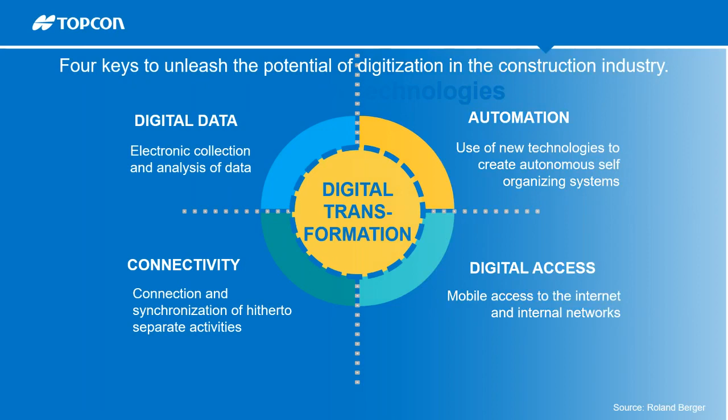Construction technologies. When you hear about construction technologies, what comes to your mind? Maybe drone technology or unmanned aerial vehicles for capturing real-time images from the field in less time and more accurately. There are many applications for drones in construction, such as inspection, monitoring, and project progress.

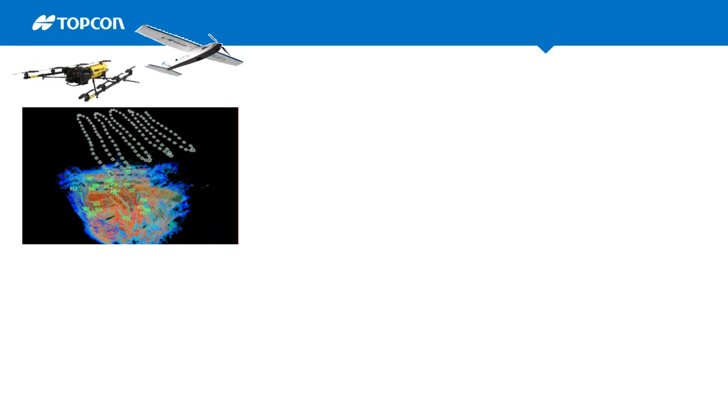Also, the 3D scanner is a high accuracy mapping instrument. It uses a laser beam to quickly capture complete details of the entire building construction project, indoor and outdoor, to create point cloud data. It's a great technology to save time and decrease error, where the scanner can collect 1 million points per second. It delivers 3D CAD models, BIM integration, and as-built documentation.

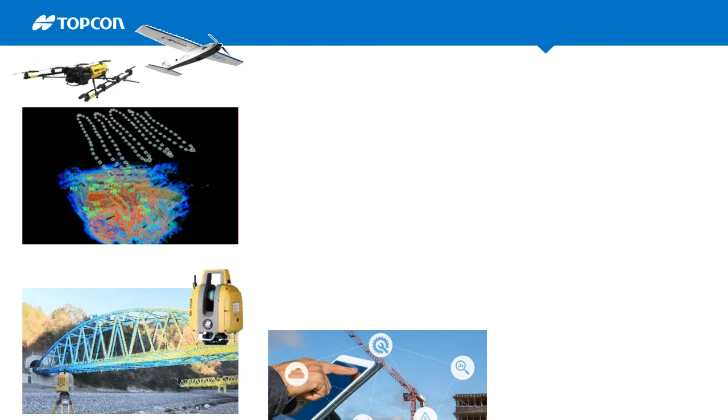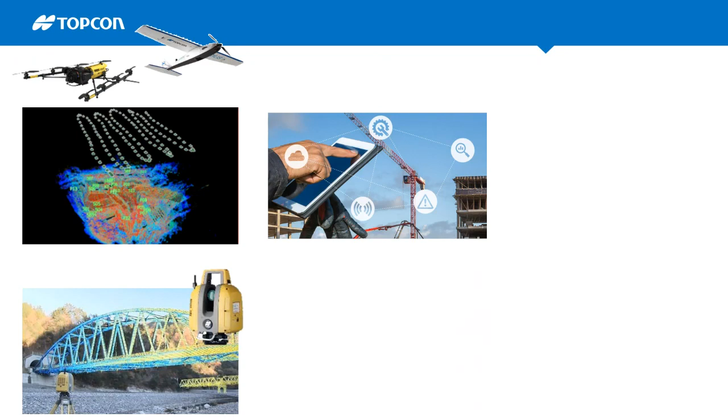Also, the Internet of Things connects products and plant sensors, systems, and machines using sensors and software. It's widely used in remote operations and fleet management and maintenance as well. 3D construction printing is computer-controlled sequential layering of material to create three-dimensional shapes. It's used to fabricate building and construction components.

Also, 3D construction mobile mapping systems. These are 3D scanners mounted on a vehicle, with LiDAR and GPS technology in addition to cameras, all mounted together on the car or vehicle, where you can scan and acquire colored 3D point cloud data in real time. Also, BIM technology: it's an integrated 3D model where you can manage, construct, design, and plan buildings and infrastructure.

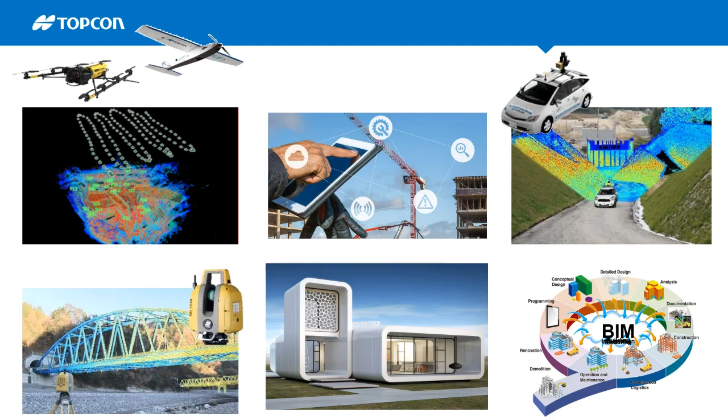Now we can see also robotics in construction. This could be off-site fabrication systems or on-site automated, or even drones itself.

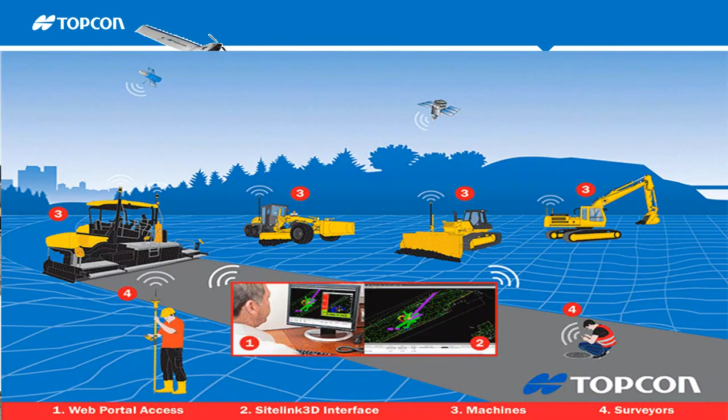And finally, we know about the 3D machine control systems for heavy machines, where we bring all the technology of GPS or total station combined with sensors and hydraulic valves and controllers to automate the blade of the grader or dozer or excavator, whatever the heavy machine is. The system will always follow the 3D design for cutting and filling and leveling. These systems are greatly contributing to improve the efficiency of civil engineering work.

Evolution of the construction technology. There is great evolution occurred in the construction technology for the last 20 years, shifting from computer on your desk to mobile connectivity, Wi-Fi, Bluetooth, GPS, and high-resolution cameras. All that have changed the industry of construction.

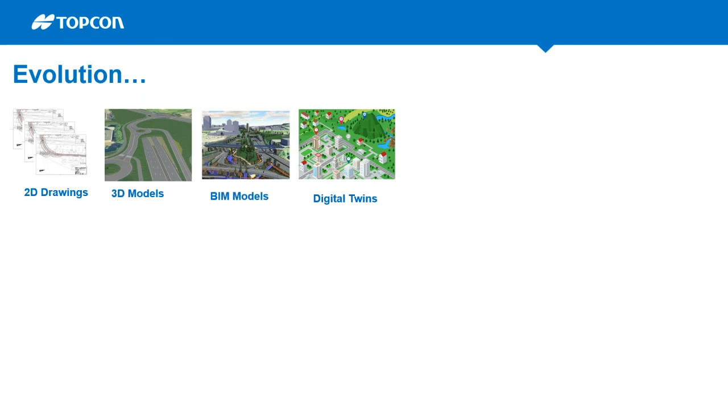We see that in 2D, shifting from 2D to 3D models, then BIM models, then now we have the digital twin. And if you look at surveying equipment, the same as like Craig said, that he was using theodolite. So now we see from theodolite to mechanical total station, then motorized total station, then robotic total station. Finally, now we have total station with a scanner.

The same thing happened with GPS technology, where GPS can be mounted on a car and collecting data and information while moving and even while tilting the GPS itself. So the same thing happened with scanning. Scanners are also developed from basic 3D scanners to high-tech scanners measuring 1 million points per second. Adding sensors to these scanners like IMU, we are able to put the scanner on the car and move in the street to collect 3D data and point cloud very accurately and very fast.

And now we are also having drones. Drones, you fly the drone and you collect images with very high resolution and you create the survey and design.

Alaa, just in terms of the accuracy, what is the accuracy when you say very accurate? When I say very accurate, it's related to the requirements itself. So when we talk about total station, the accuracy of total station could be from 5 seconds to half second, and half second equals like 1 millimeter. So accurate total station means 0.5 second total station. But when it comes to scanning, having 5 millimeter accuracy with a scanner means very accurate. So each machine here and each technology has a high and low range of accuracy.

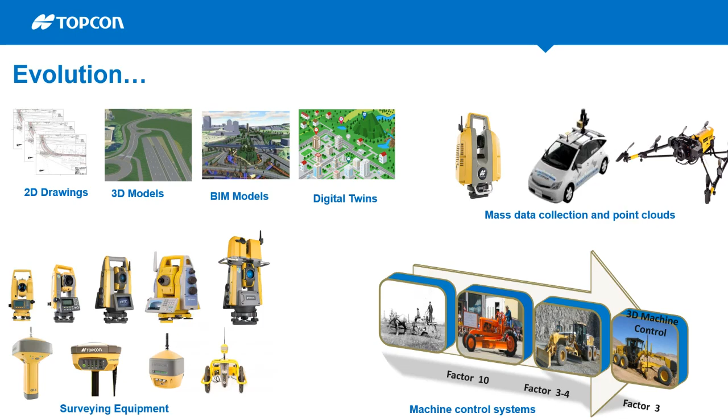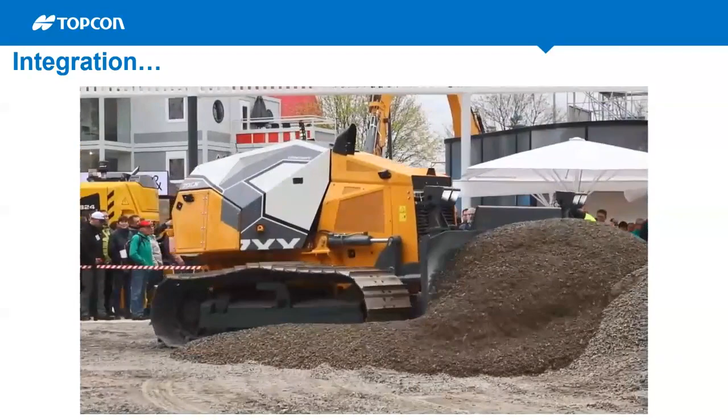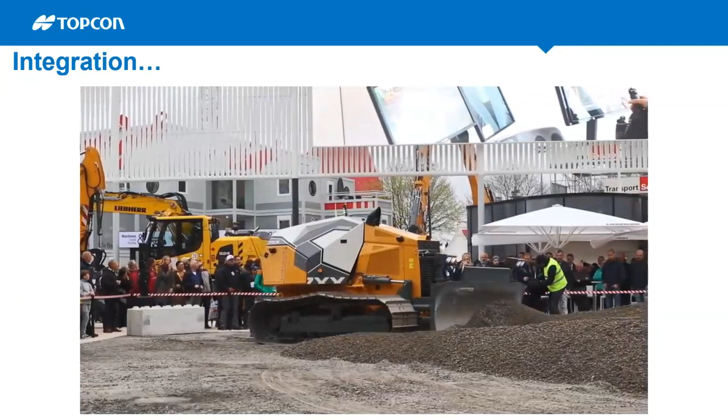This is an example of the integration where we integrate many construction technologies together to come up with a dozer that can perform the work automatically without even the cabin and the operator. So now you can see an autonomous dozer with Topcon machine control mounted on the top of it. There is GPS technology, two GPS receivers are there. There is no cabin, there is no operator, and the 3D design is managing and controlling the operation to get the work done based on the design.

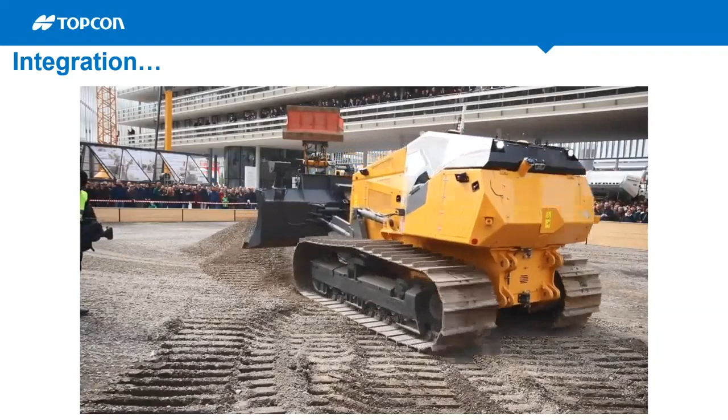So we bring many technologies together to come up with integration like this dozer. There are many integrations in different stages or phases of the project, but this is one of them in terms of machine control.

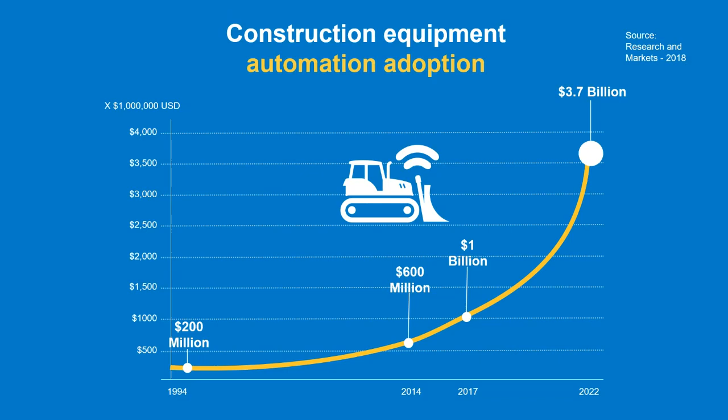But looking at one example of construction equipment automation adoption, if we look at the chart here from 1994 to 2022, we look at $200 million in 1994 adoption for the automation in construction equipment like dozers, graders, excavators, and now we talk about more than 3.7 billion expected to be in 2022. It shows that the adoption of the technology is increasing significantly. So we are expecting more than that, but we see that adoption is going. I don't say that this is happening here in the Middle East, but this is the global data.

The same thing is happening with 3D model and BIM technology. So from 3D model now we are connecting to 4D as time, 5D is the cost, and 6D is the maintenance.

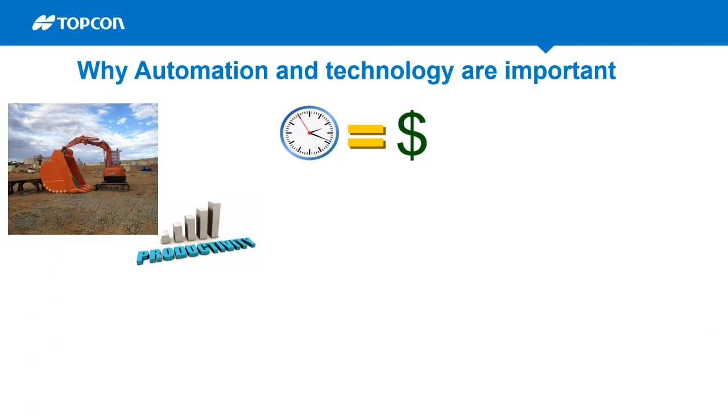Why are automation and technology important? Automation and technology are important because there are challenges of finishing the project on time. There are a lot of delays in the projects, and we need to save time. When we save time, it means that we save money. Not only that, we need to increase the productivity with the same resources we have. Only technology can do that.

Challenges of safety at the construction site. You see, dozers have made accidents because of people around or machines around or any trucks there. But having a machine control system mounted on the dozer means that there are no people around the machine, and this increases the safety. The challenge of increasing cost during the operation: we need to avoid the error, the rework, the delays in order to decrease the cost. Secure data via cloud and accessible data is also one of the things helping the construction industry.

The lack of skilled machine operators who can do the fine grading is also a challenge now, and using technology like machine control is eliminating the need for skilled operators. Also, getting efficient work done and high accuracy deliverables need technology. This all needs to be integrated together in one construction site in order to make sure that we avoid any delay and we finish on time, and also on budget.

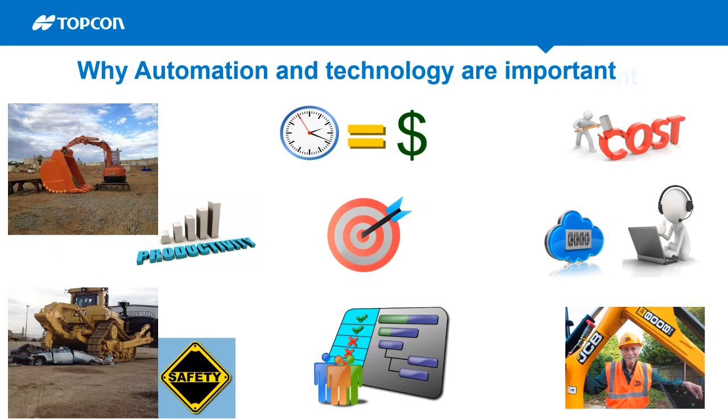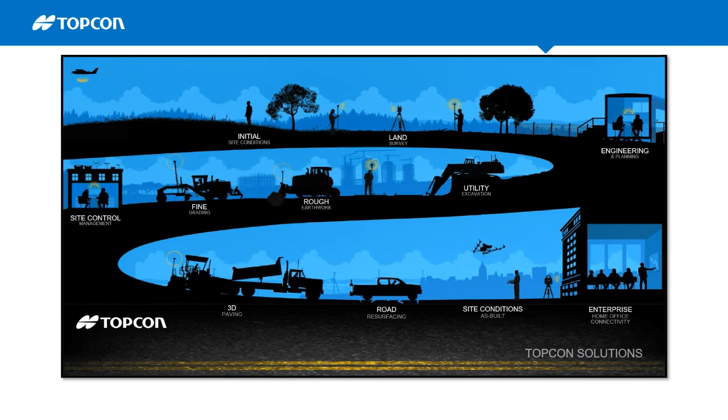site condition, where we need to collect information by drone to know about the topography of the construction site. Then we use technology like GPS and robotic total stations. Again, we need to put machine control systems on excavators, dozers, and graders. Also, we have available technology for paving now, and scanners to scan roads for resurfacing and maintenance, drones to do the as-built and inspection. So technologies are available for all phases of the project. Let's take one example of this technology and watch a video to see how this looks.

So surveying and collecting information from the site is always a challenge, where crews of surveyors and surveying instruments are spending days and weeks to collect data. Now, mobile mapping technology, as you can see mounted on the vehicle, is able to collect millions of points in a few minutes. Scanning while driving in the street, you collect all the features of the road, all the buildings around,

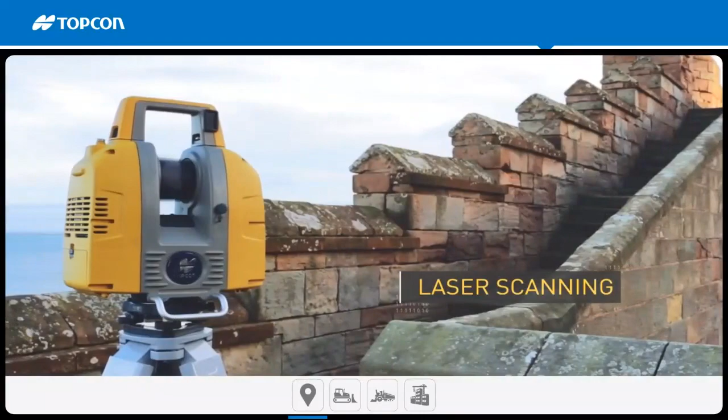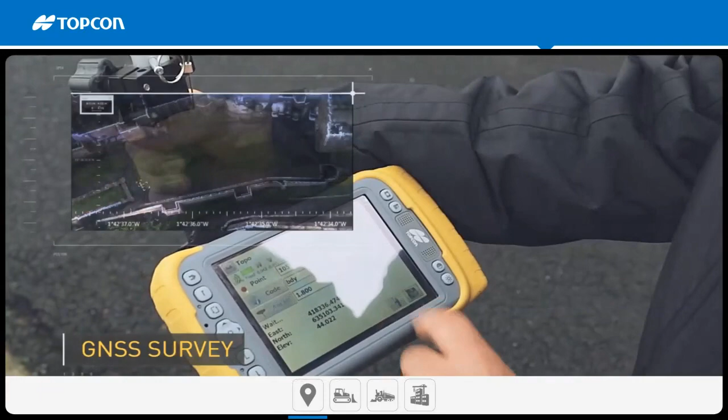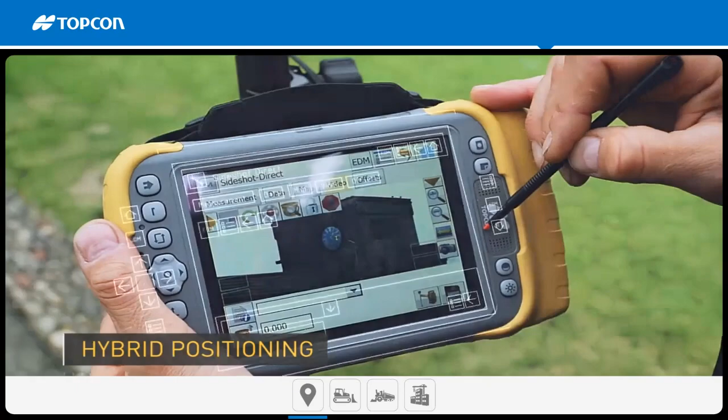combine this with stationary scanners, as you can see, send this scanner inside the building to collect indoor data using GPS technology with the same design file, integrating all these files together to send between machines, between GPS, total station, and the mobile mapping scanner. You bring all this data to the office, and you are able to do your measurements and design modifications, whatever you like to do, with very accurate data.

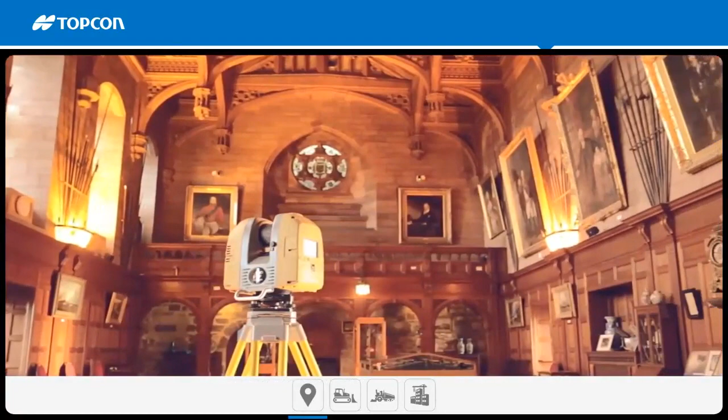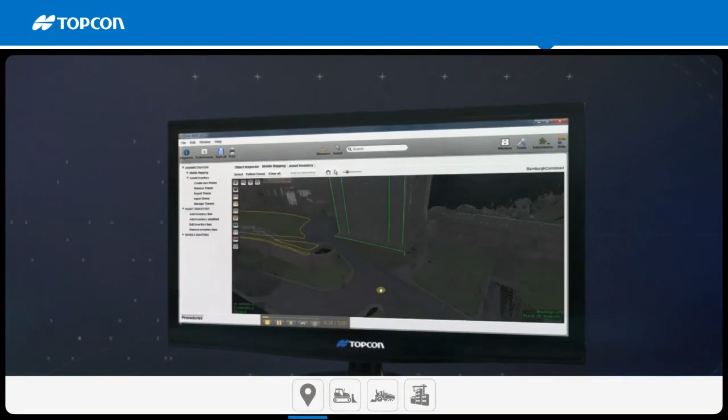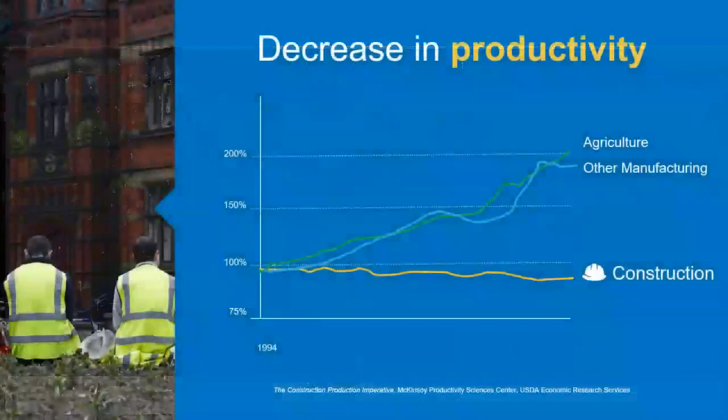Here you can see how the building became just a point cloud model, a 3D point cloud model. Here the scanner is scanning indoors, and we combine the data of this scanner with the data of the vehicle scanner to bring all this together in one model to the office. In the office, you are able to do all your measurements and all the design you want. Very accurate data, millimeter accuracy. Then you can send this back to the site to execute the modification or whatever you like to do. So this was an example of the integration of technology for surveying and mobile mapping.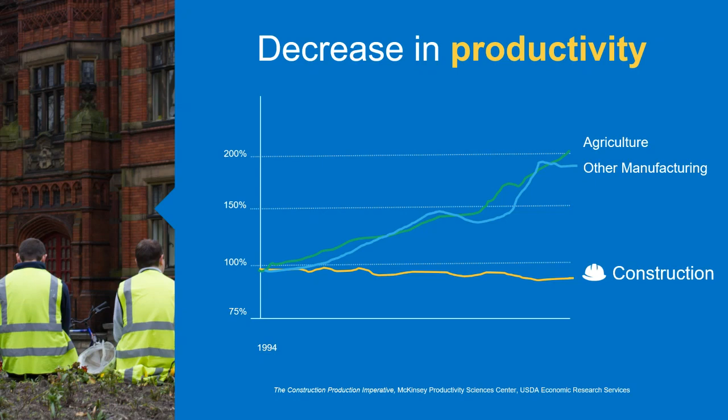As you can see, there is an increase in productivity for agriculture and other manufacturing, but with the challenges on the construction site we have now, productivity is decreasing if we don't use technology. There is a big gap between what technology is available for the construction industry and what has been deployed and adopted. So with the challenges the construction industry faces nowadays, technology is the only way to catch up and increase productivity. Moving to the impact of automation on the construction industry, automation has a positive impact on productivity and cost saving. We have some examples of that impact.

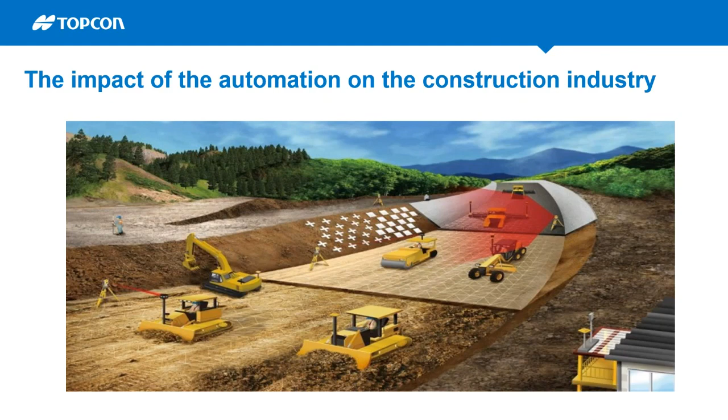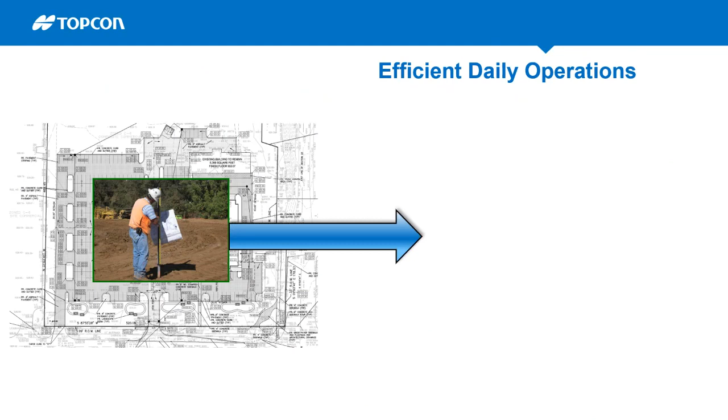Here we can see the traditional way of moving printed drawings from the office to the site, going to the site and trying to put the levels and slopes on sticks and pins. But now you just need to send the 3D design file to the control box, and the machine will do the cut and fill automatically without any intervention, without any printed designs. Just a small file uploaded to each machine on the construction site. We don't need to send people to the site.

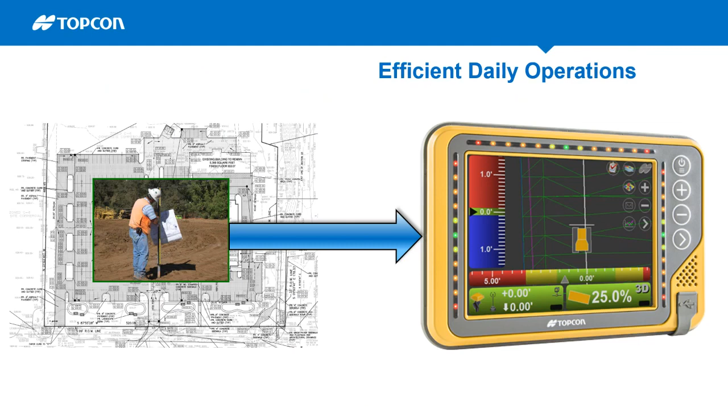This is the impact of the technology, where you get efficient daily operation. You also shift from 2D design to 3D models. And as you can see, we use 3D models in all phases of construction, starting from the design, also with machines, and even to calculate quantities and get the point cloud.

Also, we are getting fast and real-time 3D mass data collection. It's very difficult to get mass data without this technology. In general, people are collecting points, point by point, using total station or GPS or auto level. But now we have scanners, we have drones, we have mobile mapping systems where we collect point clouds, millions of points in a few hours, and bring all this data back to the office, and we do our designs and we do our stakeout job.

Improve the construction process: ICT construction, we call it ICT, which is the information communication technology, which has construction machinery embedded with machine control and machine guidance. Also, inspection is done fast and accurately by drones. So using technology and 3D designs with the same design in all phases of the project, starting from the design, as-built, machine operation, cut and fill, and also inspections and stakeout.

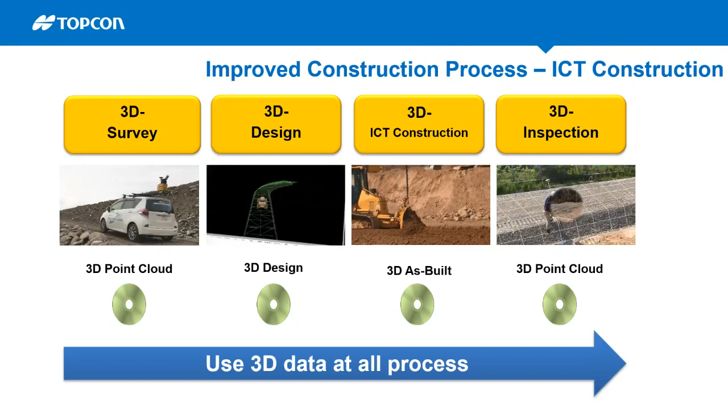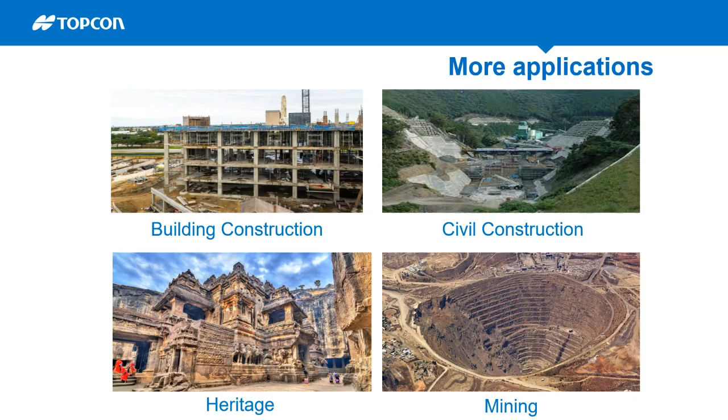Also, more applications with 6D maintenance, since we use BIM technology in roads, railways, bridges, and all this together. Also working with tunnels, with robotic total stations and monitoring systems, BIM technology; all these applications could be covered when we use technology.

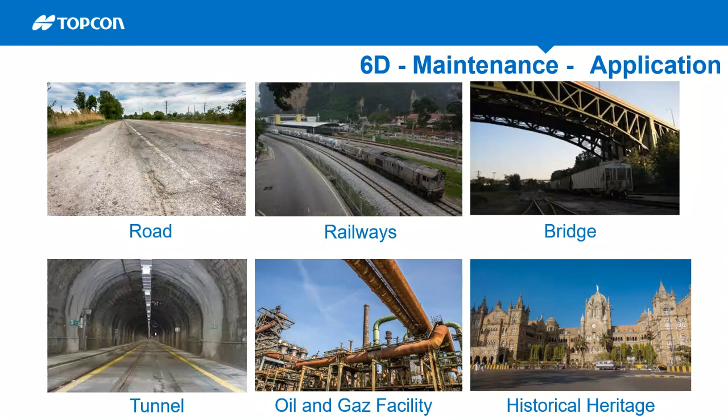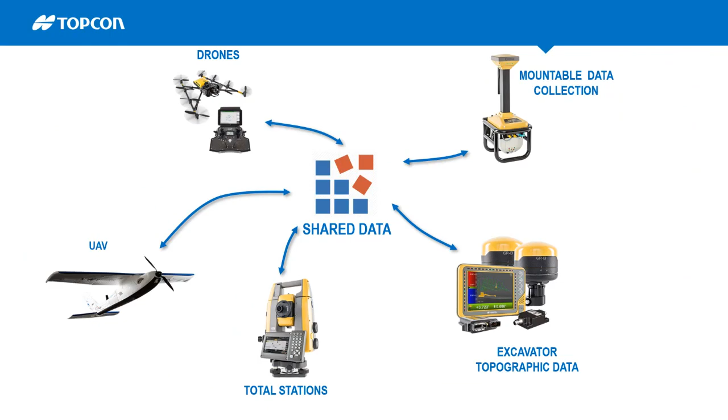Inspection applications, we do this by drones, and also we are able to share data between all machines, devices and instruments on the construction site. One of the important things here using construction technology is sharing data between all project stakeholders, which has a positive impact on improving the process and developing the integration and communication between the members of the project.

For many years, the construction industry has had the challenge of communicating information efficiently to clients. Owners had to go to the field to check themselves, but now cloud-based technology is allowing customers to remain updated on the progress of their project every step of the way. So, for example, we have examples of this. Sending data from the office to the field to do tasks is easy now. You just press the button and you send the task and file to the site.

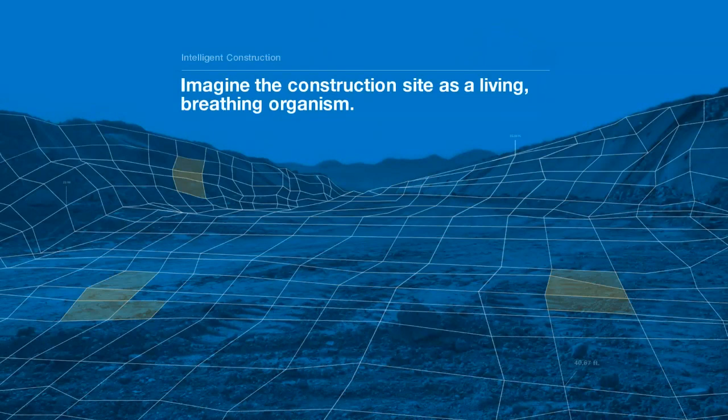Also, getting real-time information about the operation on the construction site is now available by connecting the office to all machines and all instruments working on the construction site. So, such smart job sites allow you to connect more technologies and link to other systems, sensors, cloud, and software in order to improve communication and real-time reports and information. That all leads to what we call intelligent construction.

The construction industry goes digital, no doubt, and those companies that move early to develop and implement their own digitization strategy will be the winners. Keep in mind that construction technology is constantly changing the industry. So be sure to keep up with the latest trends and research into how construction technology could help you to increase productivity, improve worker safety, and reduce the cost of labor.

By the end of my part of today's presentation, I hope you are now aware of the importance and the impact of construction technologies and automation on the construction industry.